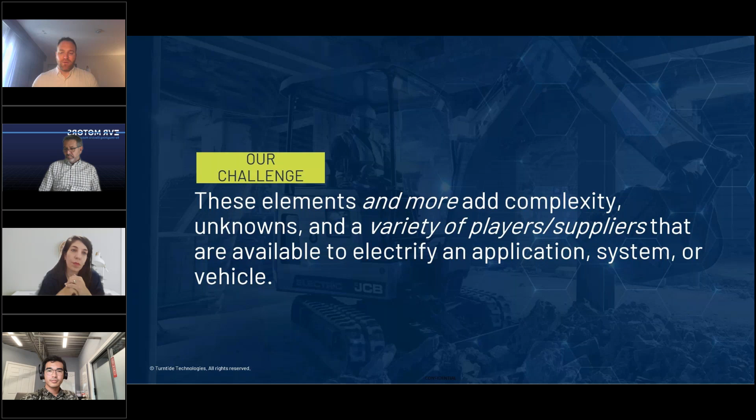One thing I love, a quote from our CEO Steve Horniak, speaks to the fact that we're seeing OEMs no longer looking necessarily for a part, they're looking for a partner. A partner to help with that broader system integration, right? That magic black box, if you will, where we can flip a switch and receive that EDU, that drive unit, that entire system. Obviously a bit of an oversimplification, but there are certainly suppliers like Turntide that have best-in-class energy storage solutions, motors, power electronics. But the players we think will grow the fastest and have the largest impact, and frankly the biggest value to the customer, are going to be those who build strategic partnerships.

That's really where we want to focus today, on what Turntide is calling Turntide Turnkey Solutions. But fundamentally, the broader element we're seeing with many players and suppliers in the space is basically cases where someone like Turntide and EVR combine forces for the greater good of the end customer, in this case Rise Robotics. This is nothing new. At Bauma, we heard a number of motor manufacturers, battery suppliers, and gearbox manufacturers doing the exact same thing, which is really exciting because it's going to ultimately revolutionize and expedite this journey toward electrification. So we'll circle back on that a little bit.

I wanted to kick off with a framework for the challenges we've seen, how we're working with others, and how many others are as well, beyond just Turntide. But with that, I'll kick it over to Kyle, who will speak specifically about Rise's application and some of the ways we've worked together with EVR as well.

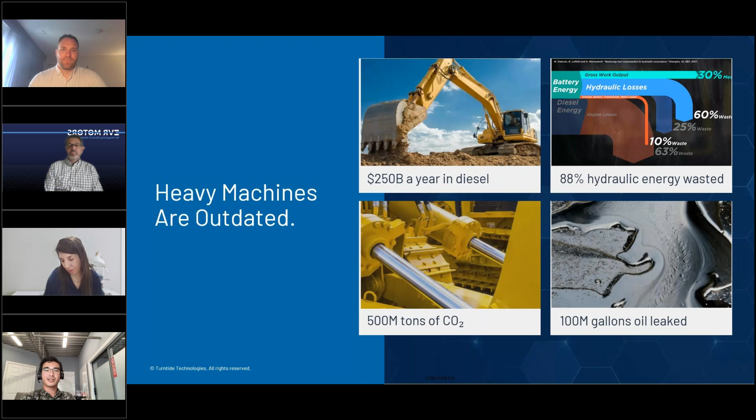Yeah. Hydraulics weren't chosen because they were more efficient. Actually, hydraulics dominate today's heavy machinery, but they're wasteful, dirty, and expensive.

I didn't want to say I messed up. I moved my notes around, but anyway, I did say it was a live event, Kyle, and everyone understands. It's all good. Yeah, thank you.

So essentially, hydraulics, while they are the only thing that can do the job, they are costly, hard to diagnose where the leak is. Sometimes it happens internally, sometimes externally, and that's what you can see from the outside. The big problem with its inefficiency is usually the control.

You have to throttle, if you want precise movements, you have to throttle the excess energy back to tank. So for machines like excavators, you're often dumping 80% of that back to tank, sometimes 90. I was reading a report from Fluid Power Journal indicating that 20-ton excavators often are only 5 to 10% efficient when you start at the fuel going in. Most of that is lost to an even split between internal combustion waste and hydraulic energy waste.

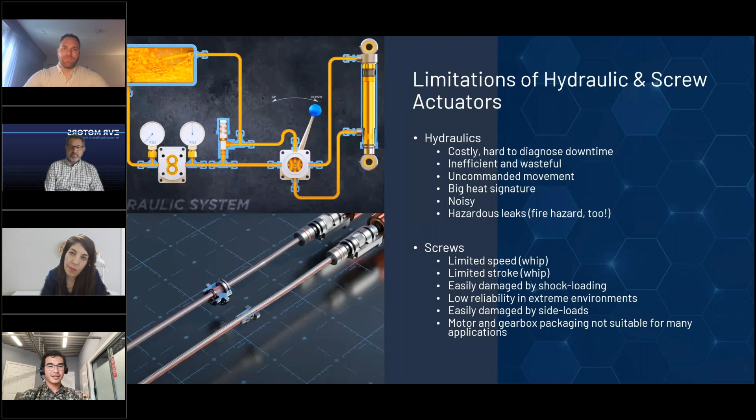So yeah, you can go to the next slide. So hydraulics weren't chosen because they were more efficient. They won because they got the job done faster.

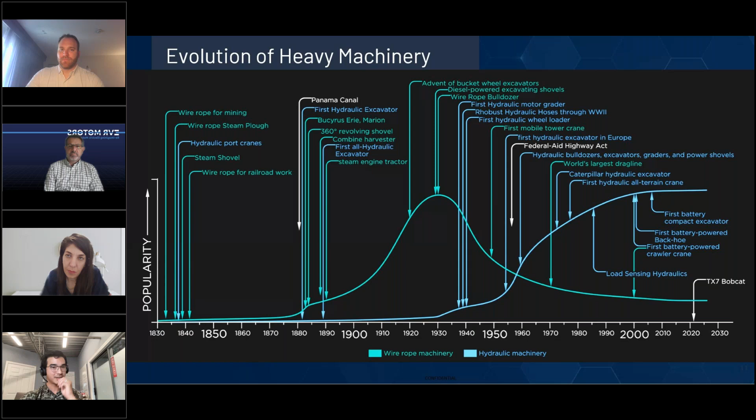All right, so we believe we have that better option, and we call it Beltdraulic. It's an answer to decades of compromise. It's fast, fluid-free, and delivers hydraulic-like power without the mess. Next slide.

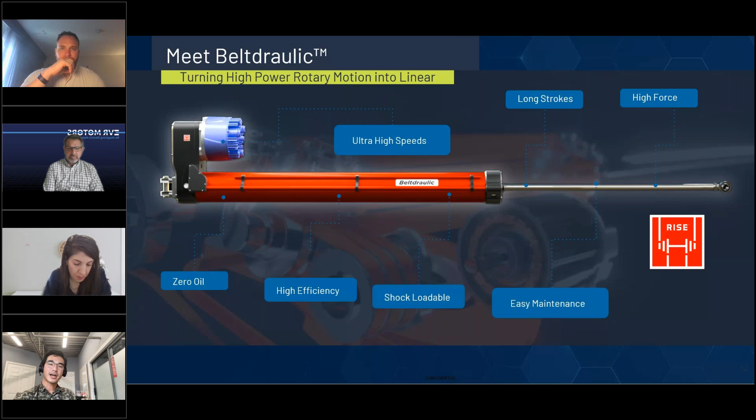It combines the strength of a block and tackle with the speed performance of elevator grade belts. So you couldn't put elevator belts into block and tackle configurations because belts only want to bend in one axis. Block and tackles are really cool because for every turn around that spiral, you can essentially create leverage, a gear ratio per se. And if you were to do that traditionally with an elevator belt, you'll just destroy it really fast.

And why would you want to use an elevator belt? Well, because it allows you to have much smaller minimum bend diameters, and you can go way faster. It's very much like a car tire. So what we've done is figured out how to combine the best of both worlds, and now you can have a complex block and tackle in a near form factor to a hydraulic cylinder. So it quacks like a duck, behaves like it, without all the problems. Next slide.

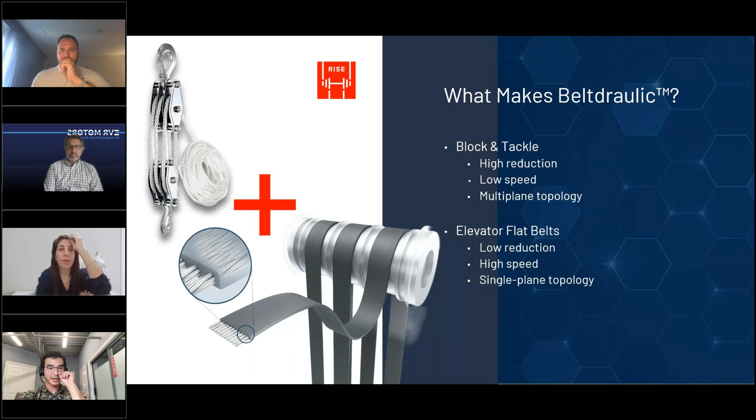We've proven this Beltdraulic tech in the field, first with the US Air Force, where we built the world's strongest robotic arm, then commercially with our liftgate, which solves the dead battery problem, delivers smoother operation, and zero maintenance through the life of the truck trailer.

That's right, you don't have to repack seals, you don't have to change the fluids, you don't have to do any of that. You shouldn't even have to re-grease the slides on the liftgate. And as time goes on with our pilot customers, it should pay itself off in about half a year. While it's not official yet, I'm of the opinion that this liftgate is the world's fastest high-capacity liftgate.

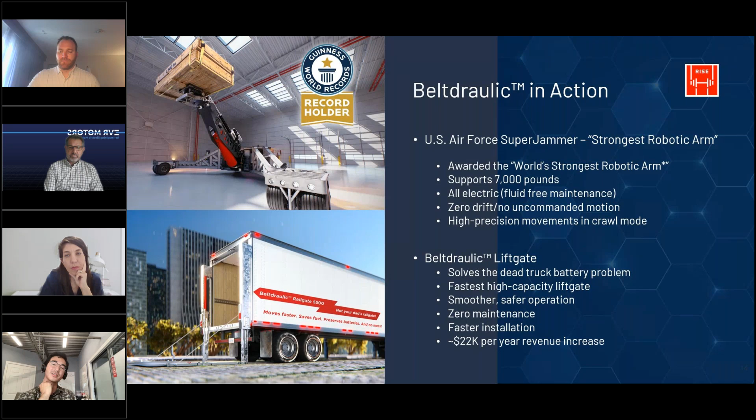Ball screws should generally stay below 1 meter per second of rod speed before the little balls start pitting the races. Now roller screws are usually the better alternative, but at 2 meters per second, at relatively short stroke lengths to produce the same force, you'll start to have whip or resonance even at 16 inches. So that's why you don't see roller screws doing any long stroke, high force ram-like operations.

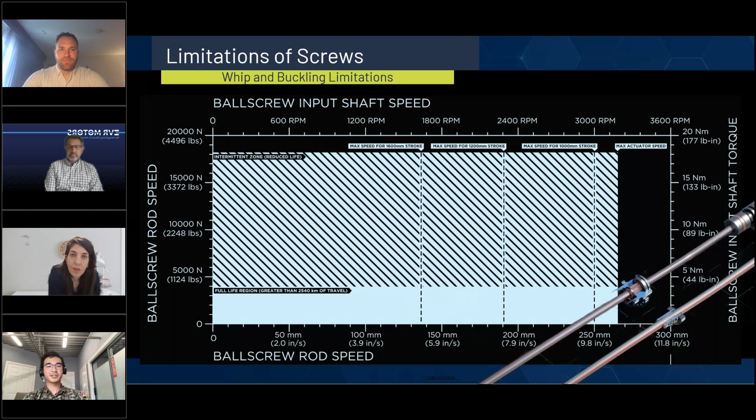Now compare this with our 2-ton Beltdraulic cylinder. As long as you stay under 50 Newton meters of torque as defined by the working tension of the belt, and you stay below 14,500 RPM as defined by the maximum rated rotation speeds of the bearings we've sprinkled throughout the cylinder, you would effectively get 4 meters per second at 2.25 tons rod force.

That would be about 100 horsepower of throughput. Now you're probably saying those speeds are pretty alien, and that's why we're looking to motor companies like EVR and Turntide to see what is possible. We can add more turns in the block and tackle or not, but just with this sample cylinder we've got, this double acting, theoretically you can do this kind of speed, which is alien. Go to the next slide, please.

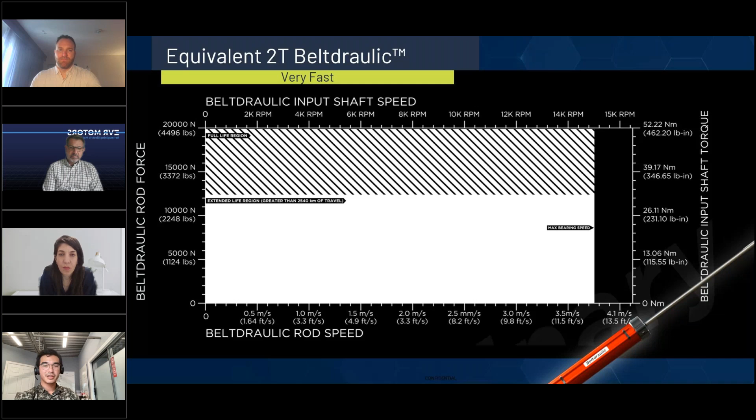This is like a side-by-side of the 2 graphs we just looked at. The Beltdraulic is the long bar, that would represent 4 meters per second on the X. And then a ball screw for that same force obviously is not as fast. Next slide.

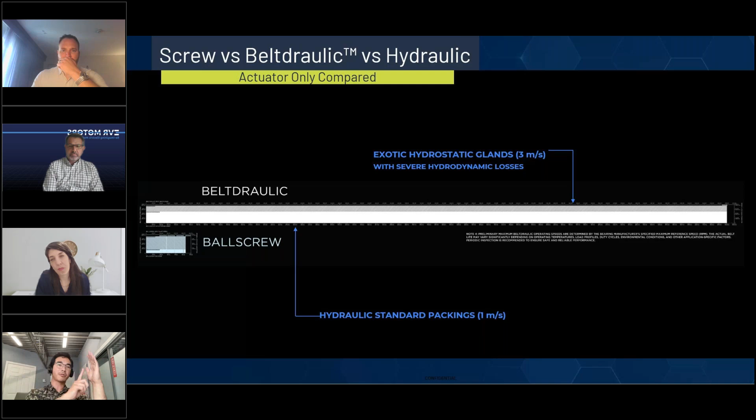Just for general understanding, hydraulic packings typically are rated for 1 meter per second. If you were to go faster than that, which you could, you'd start to hurt the packings. And if you really wanted to go faster without hurting packings, you would typically move to hydrostatic glands, but that would allow you to get up to 3 meters per second, with a drop in maximum force at those speeds. Often you'd only be able to do half the load at that speed, largely because of hydrodynamic losses—all the fluid trying to enter the barrel and make a right angle turn.

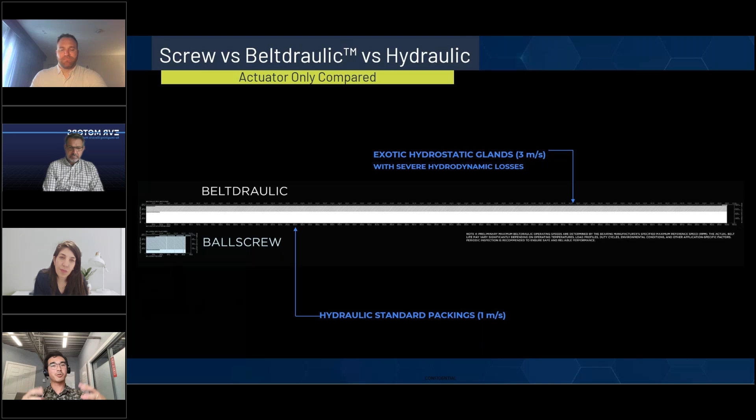Now when you look at Beltdraulic and you're able to dispense that much power, up to 4 meters per second, that's kind of alien. It really comes down to what kind of rotary motor you can put onto it. Next slide.

To power the Beltdraulic cylinder, we need a motor system that could match its performance: high torque, compact, and reliable. That's where EVR and Turntide came in. Their combined solution enabled our high-speed, high-force actuators to operate seamlessly and efficiently without a gearbox, and that was pretty big for us. I'll show you how that compares later.

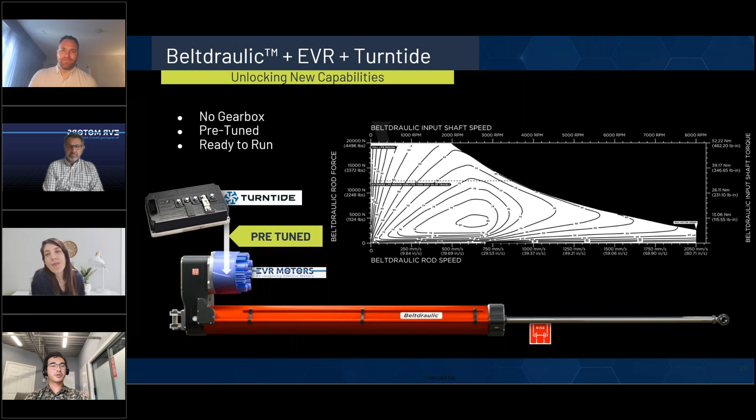So that changed everything for us. Our 2-ton Beltdraulic cylinder was able to dispense 20 horsepower at 48 volts without a gearbox. That's fantastic—we previously were limited by the gearbox. Now we're not. We've kind of opened up a whole new way of thought where we can actually start thinking about setting Guinness records on actuation because we can get around the darn gearbox. Next slide.

Normally integrating a motor with an inverter is a time sink. Hopefully that video autoplays - it shows this thing moving at speed.

Normally when you get a motor and inverter, it's a huge time sink. You have to make the harnesses, do the tuning, the pairing, general compatibility. It's a big problem, and I don't think it's our lack of know-how. I've been talking to other companies - everyone suffers from this problem.

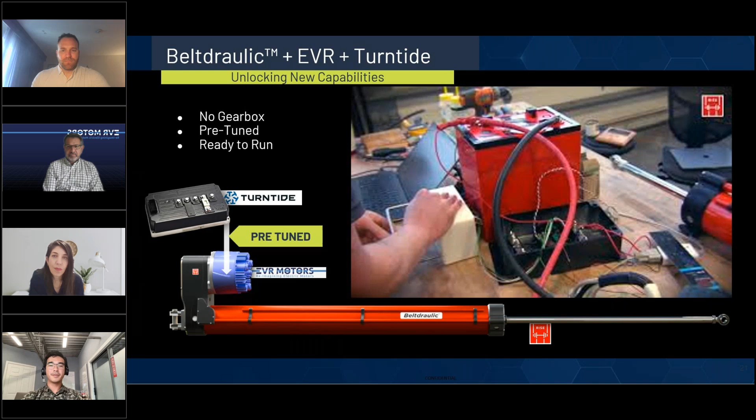When I shared this with Kobe, EVR responded by delivering a fully integrated, pre-tuned EVR motor with a Turntide inverter. With their help, we had it running in days, not weeks, and we demoed it live just in time

for Bauma. This kind of smooth integration is rare, and it's exactly why EVR built their own internal controls team and partnered with Turntide to make it easy for folks like us to evaluate how awesome their technology is. Compared to the other suppliers we were looking at, it just worked.

The white graph with the efficiency lines represents our actuator in combination with the specific EVR motor we've selected. That unlocked us 2 meters per second of rod speed and about a half a meter per second at full load with this combo - that was really huge.

The black sliver you see to the very far left, that was us being limited by the gearbox. So to make this jump is pretty incredible, but there's still room to go.

As you can see in the photo in the lower left, we can fit EVR's largest motor frame size, and I want to do that next on this 2-ton cylinder. That would allow us to go up to 10,000 RPM, which would be 2.5 meters per second at full speed, and we'd be able to do a full load probably up to - if I'll do a wild guess - I would say 1.5 meters per second. So I'm looking forward to trying that out next.

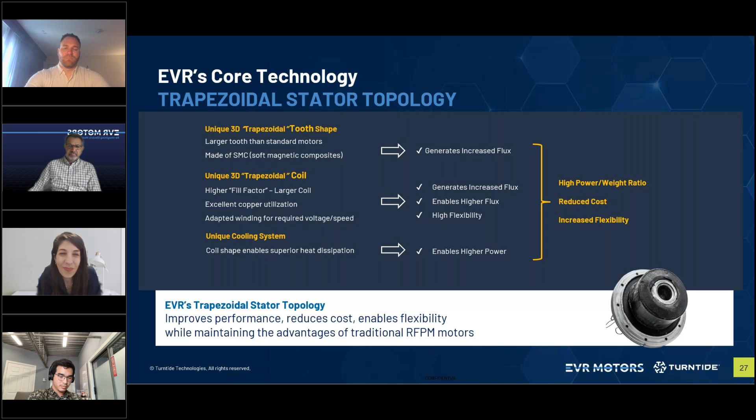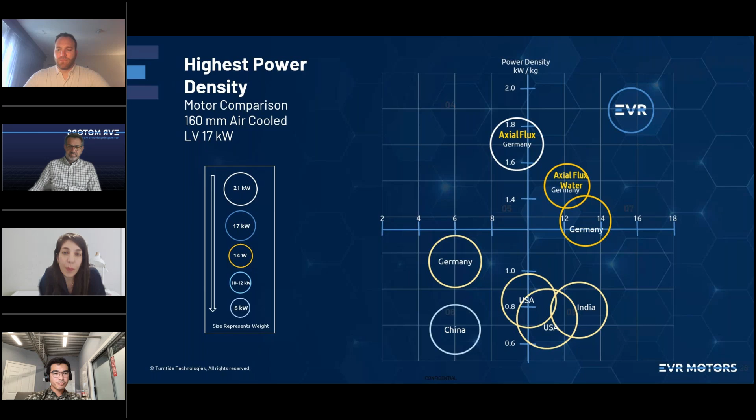So EVR has a line of motors covering performance ranges starting from 6 kilowatt all the way up to 150 kilowatt, in 4 motor families. We basically divide the motor family by the outer diameter of the motor. The smallest family is the 130 millimeter family, and then we have the 160. The 130 and 160 are sort of brothers or sisters - they're built the same way, just a bigger diameter, usually implemented by customers at low voltage: 48, 72, 96. For us it doesn't matter, because we have flexible technology around the coil winding, which I'll elaborate on in a second.

We have the technology in these two families are external rotors, SPM or IPM. It also depends on the user requirements and what is best for the specific application. The two larger families are 185 and 230.

These are built on the same concept of the unique stator shape I explained, but these are internal rotor designs, with flexibility around different lengths. They're built in stacks, so the families are divided into length: small, medium, long, extra long. The customer can choose the right motor size for his application depending on power and torque requirements, and we're talking about both air-cooled and water-cooled. Again, voltage is really dependent on the customer needs.

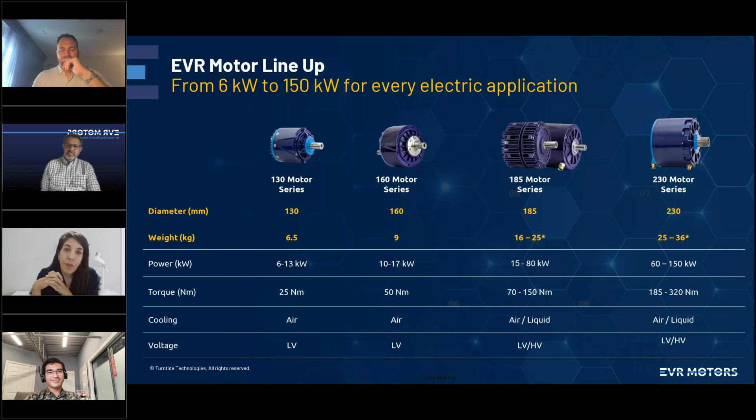So like I said, for us we're trying to offer huge flexibility where we are players in multiple segments. The needs for the automotive segment are different than the needs for the industrial segment. What Kyle needs from his application is not at all similar to what a two-wheeler needs, or a last mile delivery vehicle, or a three-wheeler, or anything that requires this range of powers.

And the idea is to say, okay, we are able to easily implement changes that enable the OEM to not compromise on his requirements, saying, okay, I have an off-the-shelf offering, I'll work based on that. We're doing something else. We're saying, based on the requirements of the application, the speeds you want to work at, the efficiency zones that you require, the voltage, the peak power, anything that is part of the SOR or the RFQ, we're trying to meet by tailoring specific items.

So, starting by choosing the motor length that helps define the power and torque. The flexibility around the coil design helps us target the right speed, the right voltage, the right peak power level. So it could be used, like I said, for multiple applications that need different working zones. A lot of adjustment around magnets and lamination, air cooled and water cooled, depending on the application and the system level. And in some cases, we even do mechanical design or interface changes to the motor based on the customer projects.

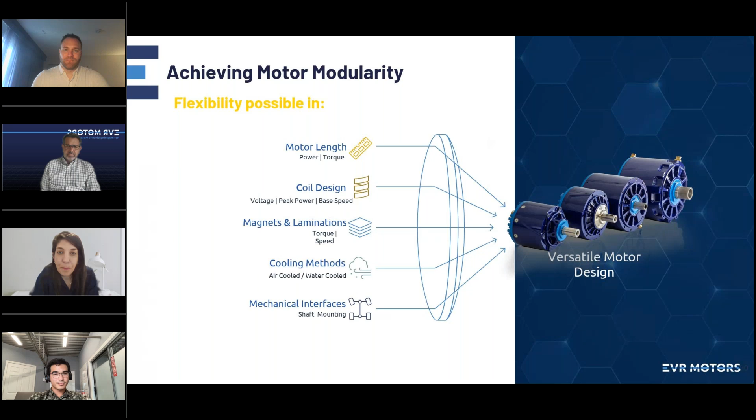EVR's location: our R&D center and prototype assembly lab is located in Israel. We have our own facility at Manesar, India, where we produce the coils which are part of our technology. We invested in the machinery for these coils and supply them to our manufacturing partner. EVR's business model is to work with tier ones and OEMs where we license the technology. Currently we have 3 manufacturing lines, all based out of India, with 2 tier ones, Napino and RSB, supplying Indian customers and European customers, East Asia and US.

So there are tier ones manufacturing the motors based on our technology, and Eka Mobility, an OEM that chose to manufacture the motors for their own application based on our technology. They manufacture the motors for their light commercial vehicles and electric buses by themselves.